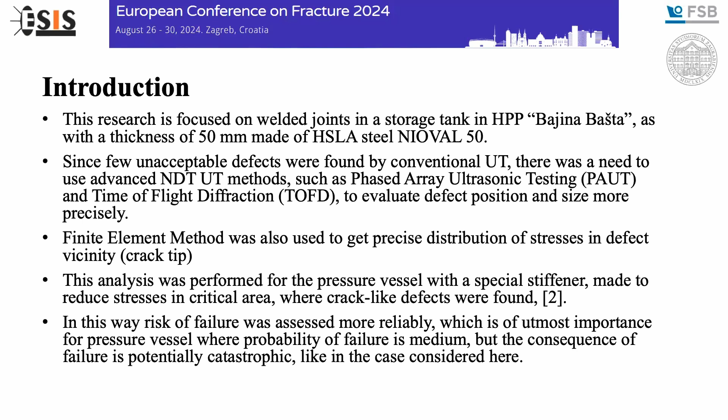This was a bit of an unusual problem from my perspective, since whenever I have to do simulations of welded joints, it's usually related to something that has gone terribly wrong. But here we were trying to use multiple methods to prove that a defective pressure vessel can still operate after it has already been in exploitation for a very long time.

Here you can see the pressure vessel in question with its parameters and dimensions, and of course, the working pressure.

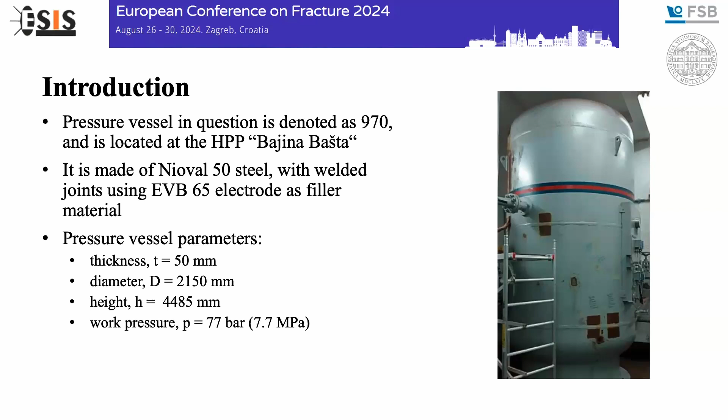It was made, like I said, from Nioval 50 steel, and the welded joints were made using the EVB 65 electrode as the filler material.

Like I said, the ultrasonic testing detected a defect inside of the wall, which was 75 millimeters long and 20 millimeters deep, but it wasn't a surface defect. It was located at a depth of 18 millimeters from the weld face, inside the welded joint, and went down to 38 millimeters in depth.

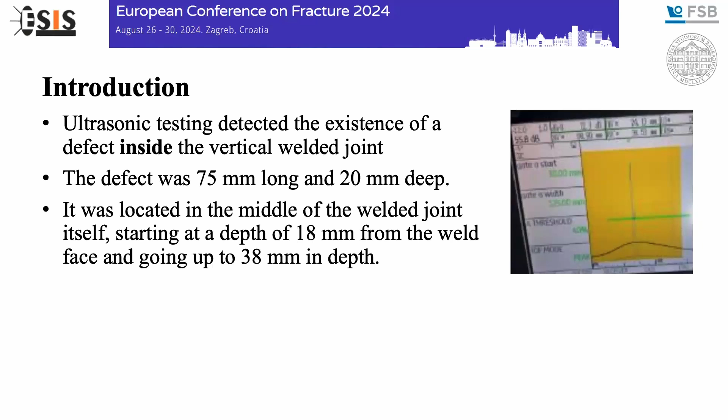We are not even sure at the moment if it was actually a crack, but we assume that it is, because this is the worst case scenario, and we'll always work with that. If we could confirm its structural integrity with a crack, then it would also work with any other type of defect.

As for the ultrasonic testing, it was performed in 100% scope along the 3 circumferential welded joints in accordance with the relevant standards that you can see here. You can also see the equipment that was used by my colleagues, the USM36KSL Kraut-Kramer device.

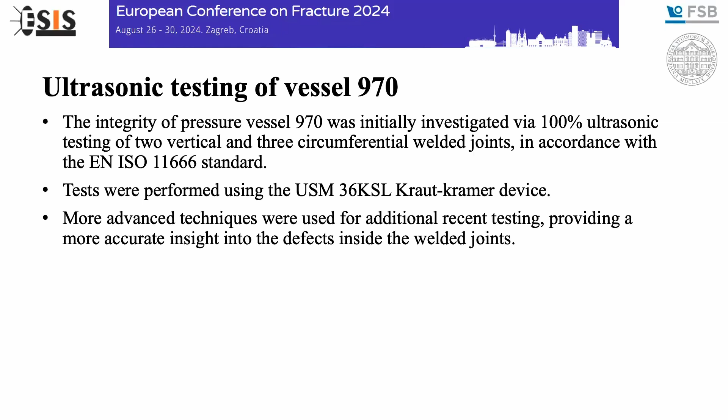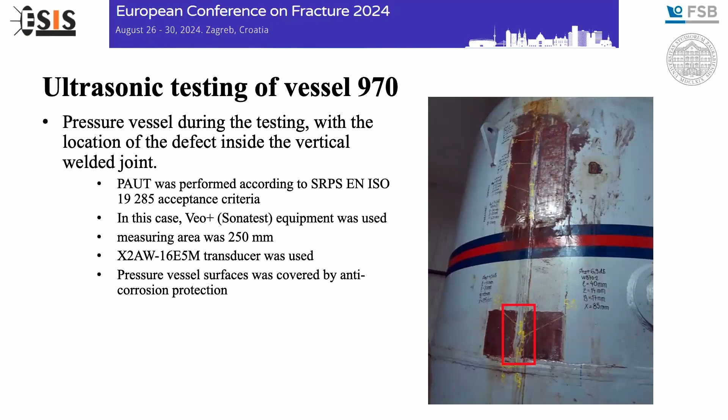This was used for the first initial tests some time ago, and now more ultrasonic testing was performed with, of course, state-of-the-art equipment. Here you can see a bit more detail about the phased array equipment that was used, with all the relevant standards, the measuring area, the transducers, and of course, the pressure vessel surfaces were covered by anti-corrosion protection from the beginning, which was something that also needed to be taken into account.

Here there's a lot of results from the ultrasonic testing. I'm just showing you some of these examples, especially since I wasn't the one who did these tests.

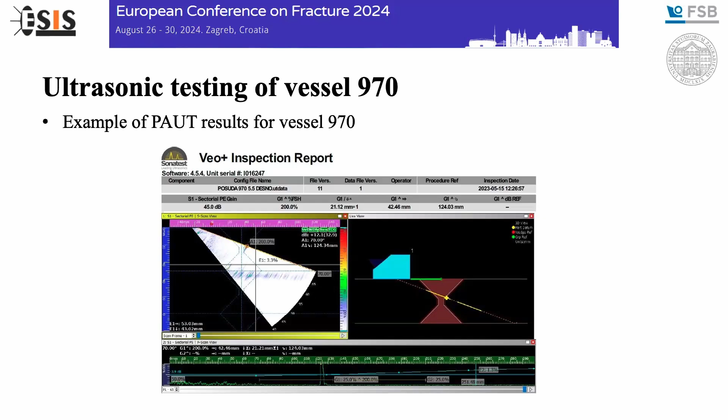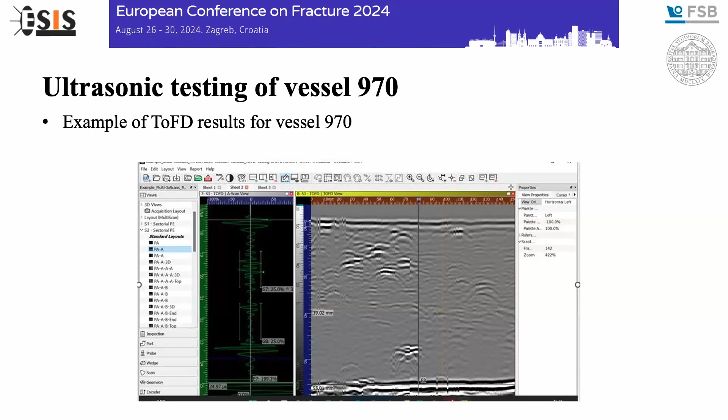But here you can see the advantages of the phased array. You can get a very detailed view of the defects with very accurately determined dimensions and the depth, length, and everything we needed. We also used the time of flight diffraction method, and here you can see an example of one of the results that were obtained, where you can clearly see the defects and all the relevant dimensions.

So once we had a lot more detailed version of the defect, we decided to also first make a numerical simulation in Abaqus using finite element method. We tried 2D models and 3D models, but we decided to stick with the 3D models because not only are they more representative, in this case, they were even easier to make, which is usually not the case.

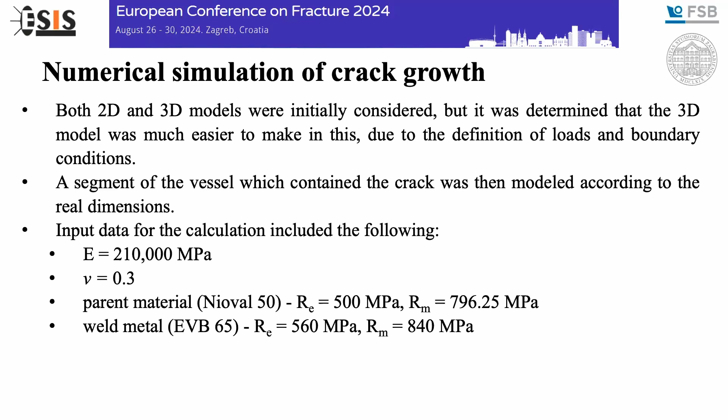So we took a segment of the vessel where the crack was present, so we won't have to simulate the whole thing, to make the calculation less time consuming. And here you can see the relevant parameters: the elasticity modulus, the Poisson's ratio, and the parent material and the weld metal tensile mechanical properties. The values you see here are true stress-strain values, which are the requirement for such calculations in Abaqus.

And here you can see the model, the segment of the vessel itself with the boundary conditions that were initially defined as fixed on both ends, but later we decided to remove this one for more realistic results. And because the crack was located very close to the boundary conditions, in that case we didn't get any results that would correspond to the later solution that was adopted with a stiffener ring placed around the vessel. But for now, we worked with... just a second.

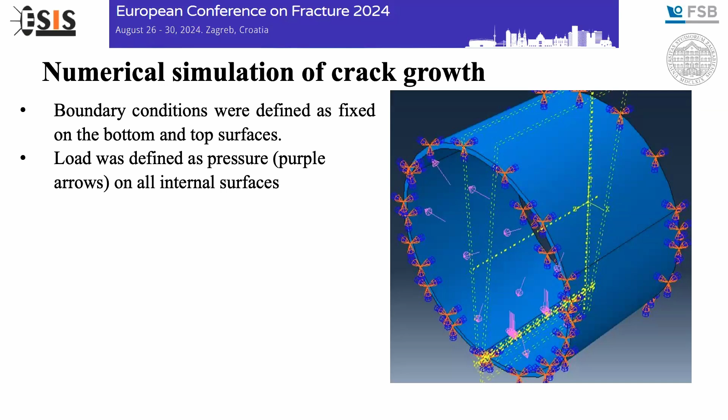We removed this boundary condition, and here you can see the internal pressure of 77 bar, according to what we found in the documentation. Here you can see the finite element mesh.

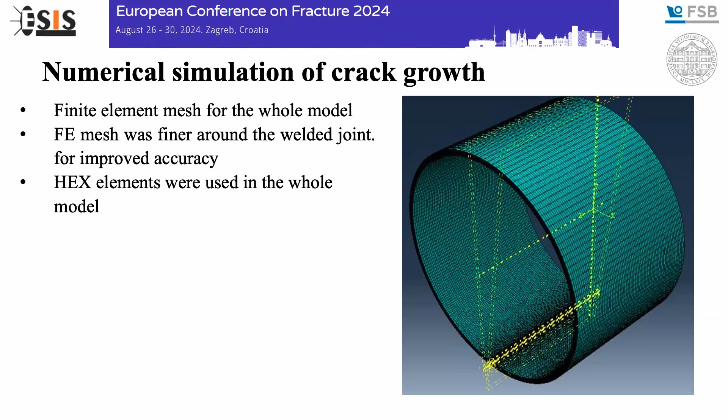Here it was, of course, more refined with smaller elements. This is where you see all of these yellow lines; this is where the welded joint was actually located. We'll see that in more detail in the next images.

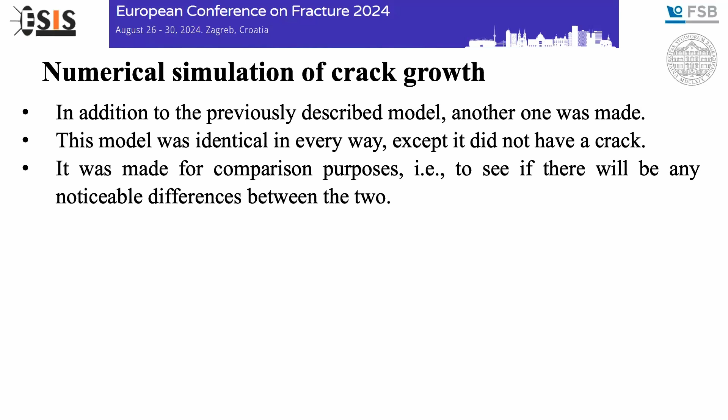We also created a model that didn't have this crack inside, just for comparison purposes, with the same geometry, same boundary conditions and everything. And here you can see the crack locations inside of the pressure vessel wall.

And here there's a detailed view of the finite element mesh in this critical area where the welded joint was located.

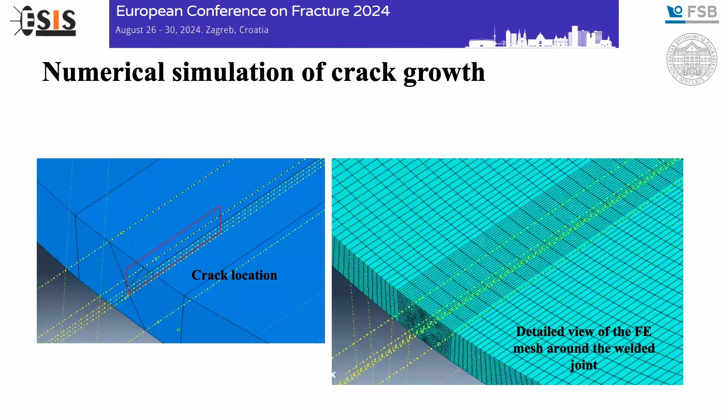And here we have the stress state for the model without the crack, which was cut vertically. So you can also see the distribution along the thickness with values which are still within the safe zone, around 356 megapascals, because the yield stress of the material used, in all the standards and the EVB 65, the lowest of the values was 560 something. So this is still safe.

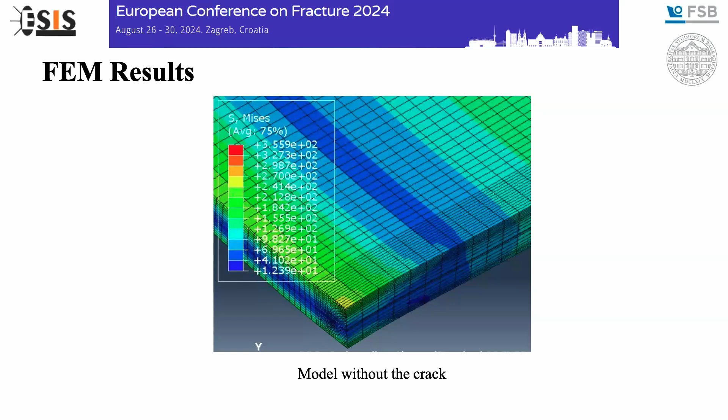Now, this is what happened when we introduced the actual crack. Here you can see the stress concentration at its tip. It's important here to note that the crack did not propagate in length in any way. It had the same length as we initially defined, the 20 millimeters, or in this case depth would be more accurate. It just slightly opened up along the transversal direction, and the maximum stresses were 563 megapascals.

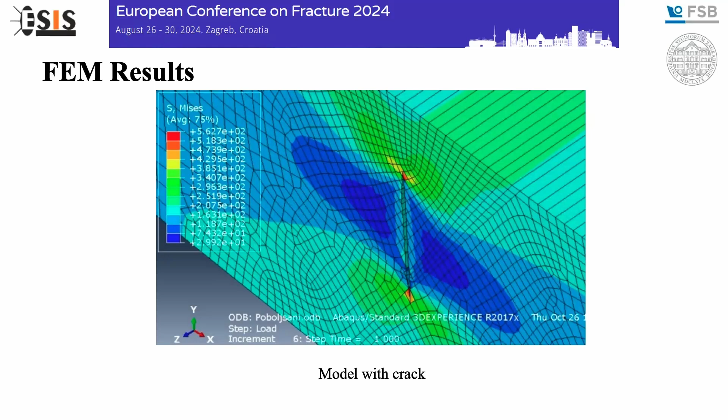Which is just around the yield stress, so the lowest yield stress of the materials, which corresponds well to what we already knew, that the pressure vessel can continue operating, because even if this was a crack, and we still don't know that, it still cannot produce stresses high enough to cause crack growth. This barely entered plasticity, and the values were very low, way lower than 1%, which is what we usually consider the lower limit before we start taking things seriously.

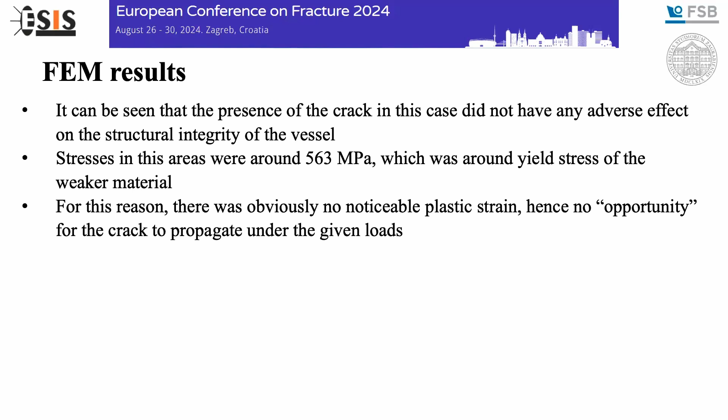So the presence of this crack-like defect did not have any adverse effects, as confirmed by the numerical simulations and also by the ultrasonic testing. There was pretty good agreement in terms that it can actually still operate, and already has been doing so for quite a while. I already mentioned the stress values, and of course there was no plastic strain, no crack growth.

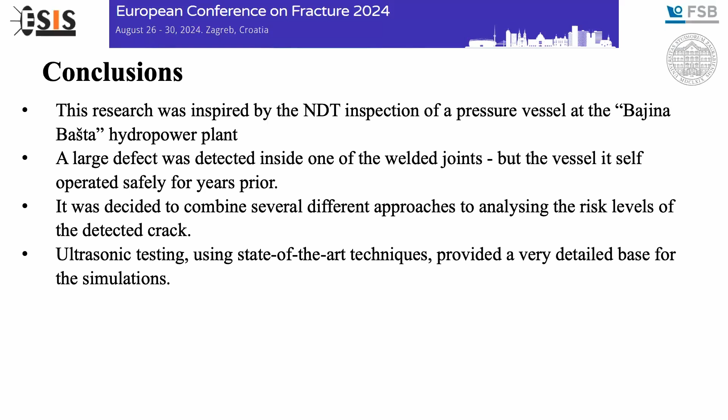So this is basically a brief overview of how we combined modern day ultrasonic testing with numerical methods to determine the structural integrity of a vessel with a defect, so a very long exploited one. And for now, we had some pretty good agreement between the results.

And in the future, we plan to also conduct a detailed fracture mechanics analysis in hopes that it will also confirm what we know. At some point, we would also like to take a more detailed look at the defect itself to see what might have caused it, and to determine for how long it can continue working.